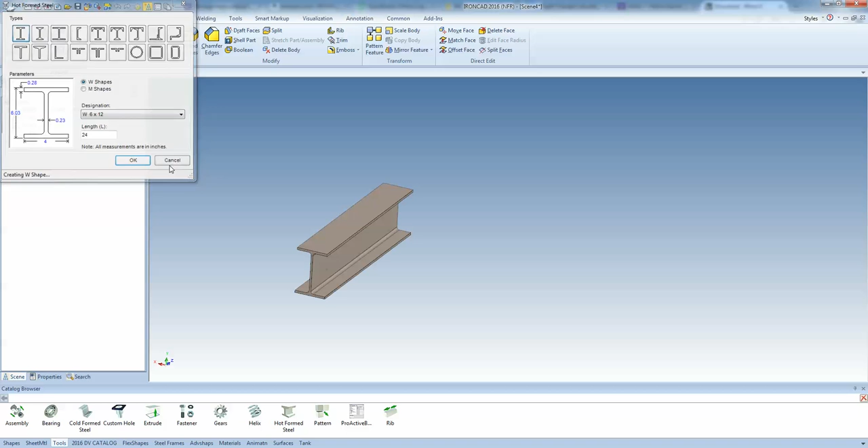From our tools catalog, we're going to drag in a hot formed steel shape. As you can see, we have just about any kind of structural shape available for your design process. For today's example, we'll pick a W6 by 12 and make it 24 inches long. By using F10 to activate the tri-ball, I'll right click and drag, and we'll link here at 24 inches.

What I'm going to do is build an assembly today without using any sketches, using standard components and catalogs. So from our Flex Shapes catalog, we'll drag in a gusset that we're going to use to mount a shaft.

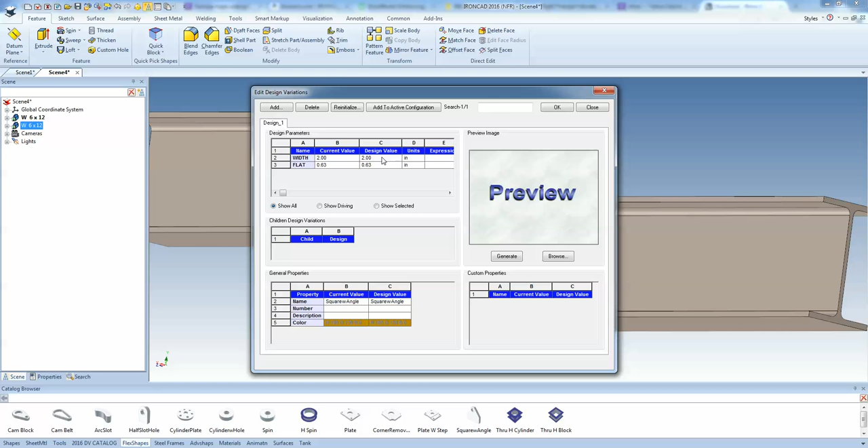In this case, we're going to be placing a bearing. I'll make an 8-inch overall dimension. We'll click on our hole, F10 to activate the tri-ball, and I'm going to edit distance from point. We're going to pick 3 inches, and we want to resize our hole to 3 inches as well.

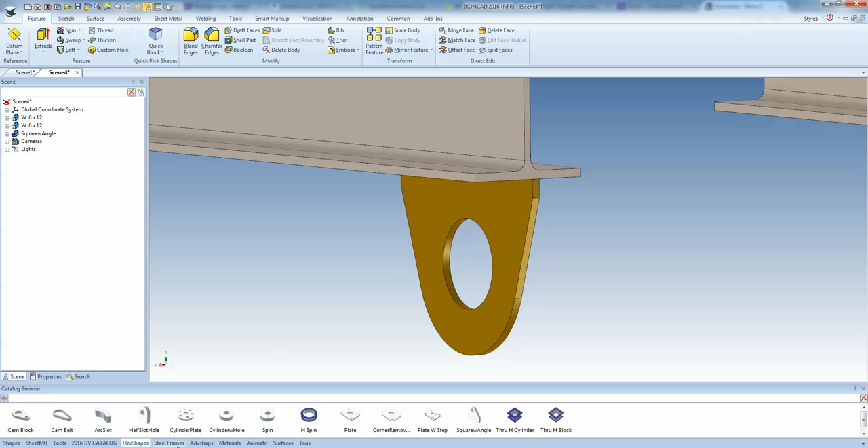Now what I want to do is go back to our tools catalog and drag and drop in our bearing. I know I'm going to use a 1-inch shaft, so we'll enter 25.4.

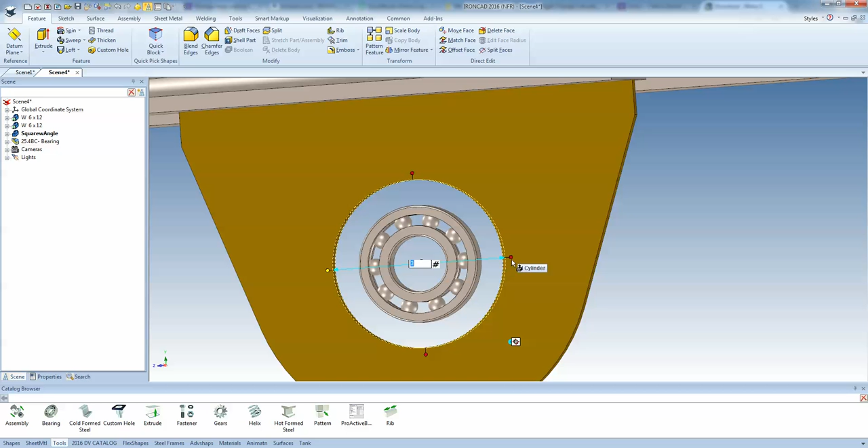Again, activating the tri-ball and using the space bar to reposition the tri-ball, I'm going to lock that axis, left click and drag to that point, left click and drag to that face so that I'm aligned. Now very quickly I can right click and snap the point, pick the outside edge so that we're lined up.

And again, I want to resize this so it's nice and flush with the bearing. Now what I can do is highlight these, activating the tri-ball and the space bar to reposition.

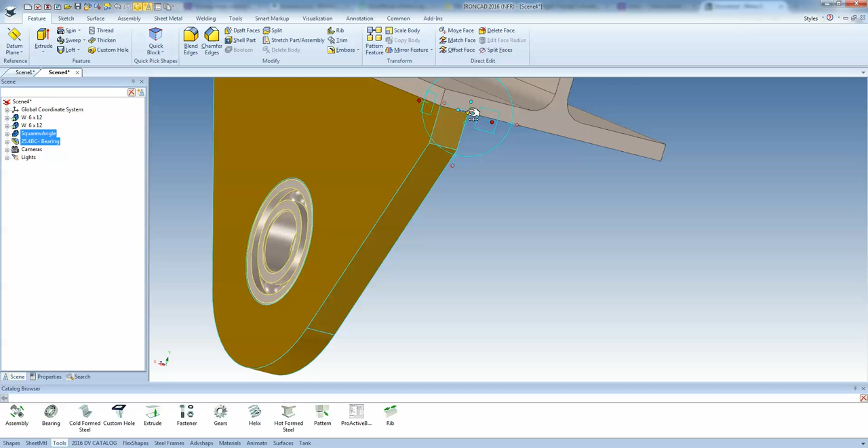I can snap to that corner, left click and drag, snap to that corner, and reposition to that corner, and I'm going to right click the point, and then right click that point and click link here. That way now I have the beginning of my two support gussets.

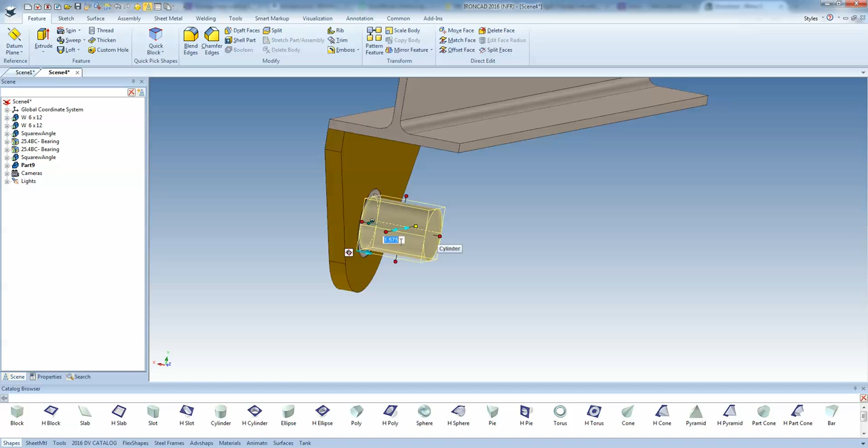Coming over to our standard shapes catalog now, what I'm going to do is right click and drag to that center point, and I want to drop that as a part. I'll activate my tri-ball real quick to reposition. By left clicking, I can type in 1.5, right click the point and snap to that point so that I'm aligned with that edge.

What I want to do is keep building on this cylinder, so I'm going to left click and drag right onto the center point. We'll type in 1 inch for our shaft diameter. Left click once on our outside handle for 2 inches.

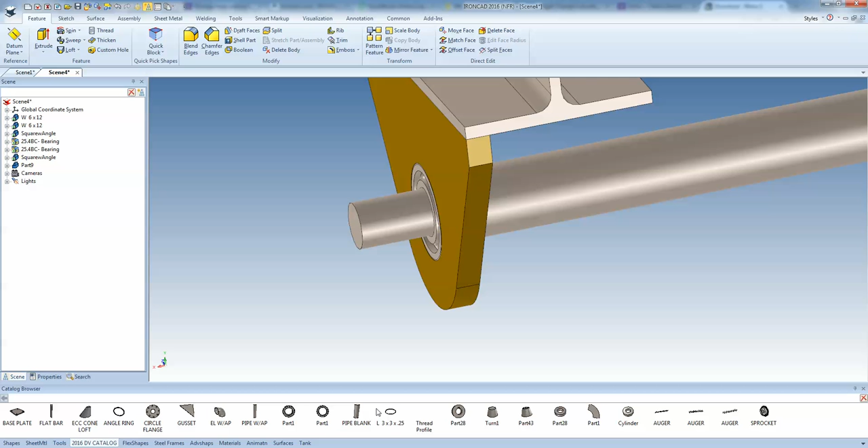Now getting into our standard catalogs, if I come over to my design variation catalog, I have a thread profile that was custom created, and since we know a 1 inch shaft standard thread is 8 threads per inch, I click OK.

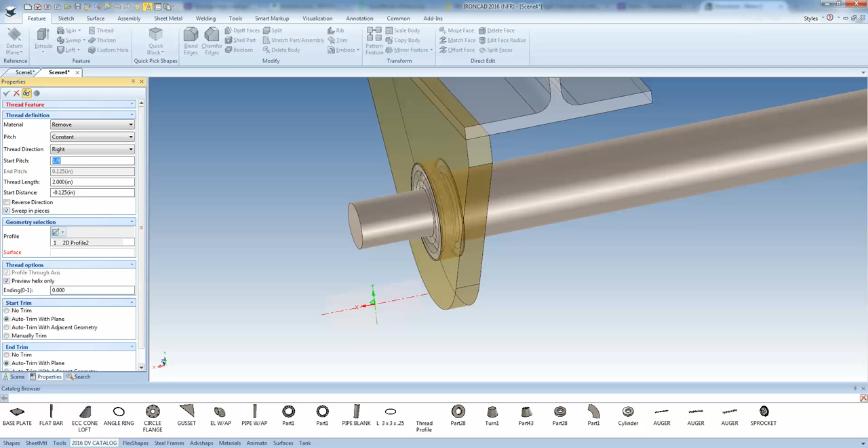Coming over to our thread feature, I can click my part. You can see it's already picked up our profile. My start pitch will always be 1 divided by my threads per inch. My start distance, I want that to match. So we'll click our face. You can see we have a preview of our thread profile. I finish, and I've created a thread really quickly. I won't need that profile anymore, so I'll go ahead and delete that out.

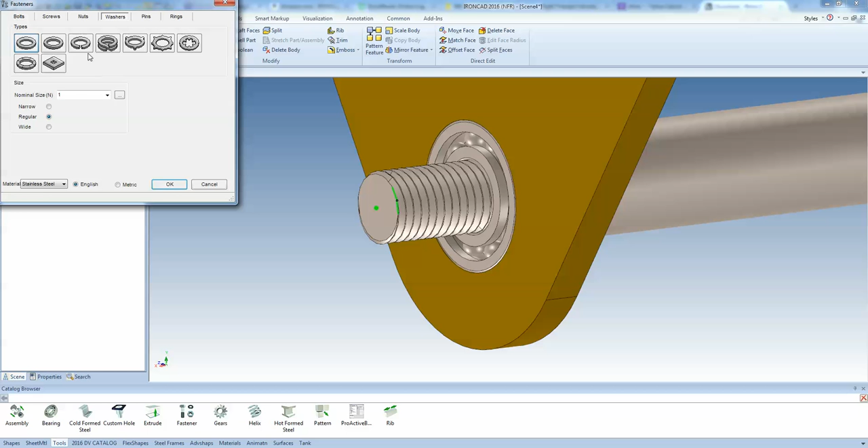Coming back to our tools catalog, from our fasteners I'm going to drop that on the front of that shaft. I want a washer. Click OK. We'll activate our tri-ball, snap to point, and again we want to put a nut on here now, so we'll drag out our fastener again.

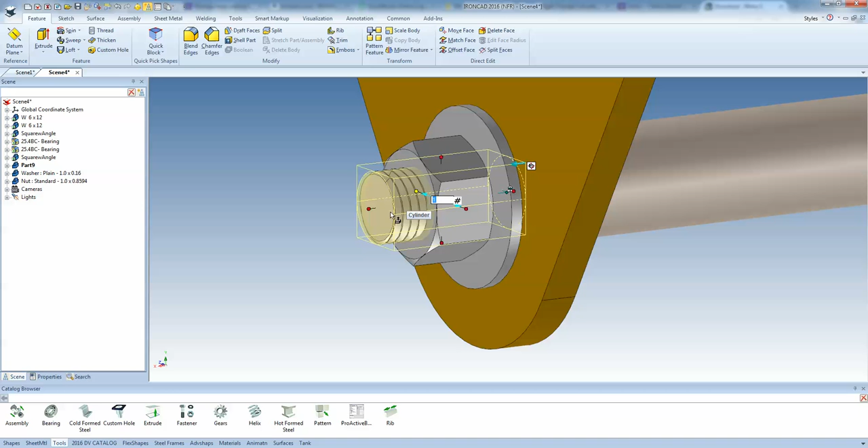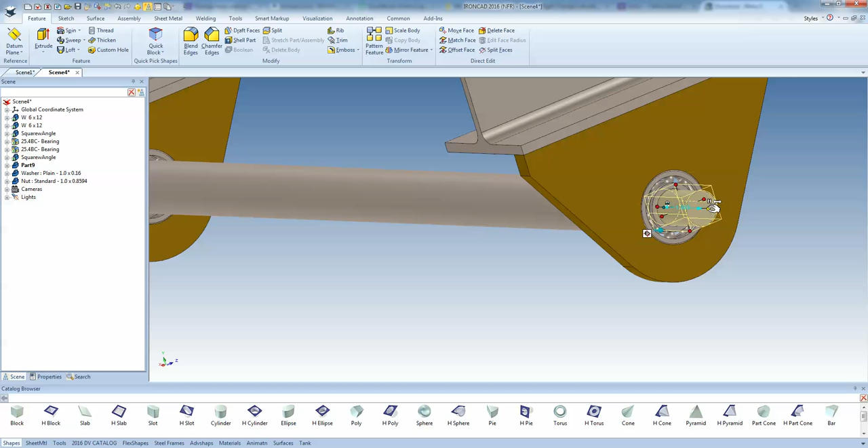Now what I want to do is continue my shaft on the other end. Coming back to our shapes catalog, we'll drag, left click and drag another cylinder, type in 1 inch again. In this case we want our shaft to be 3 inches, because we're going to put a sprocket from our custom catalog, again our design variation catalog.

In this example I have actually created this based off of a spreadsheet. So in this case I want to use a 40 pitch. My tooth quantity comes up with options. I want to go ahead and go 16 teeth, and I want to go with a 1 inch. We'll save that.

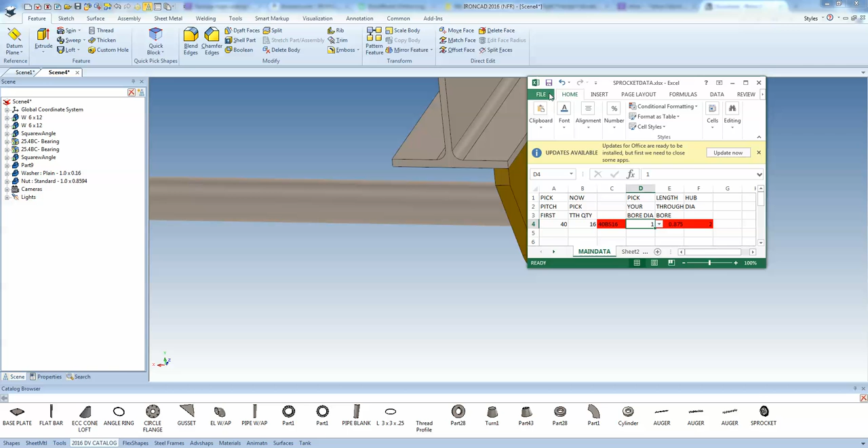I'll go ahead and hide that. Now I can left click and drag my sprocket out. It'll grab that information from Excel. Boom, builds a sprocket for me automatically. We'll activate the tri-ball and just drag that in there.

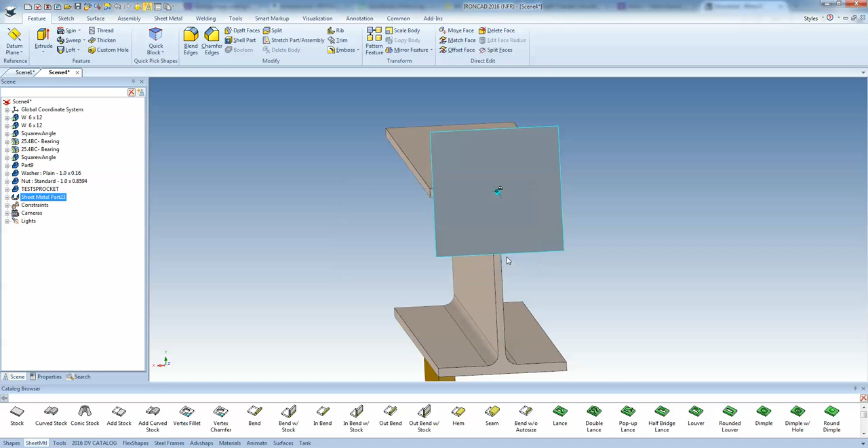The final thing let's do is go to our sheet metal catalog, and we're going to put a guard around this really quickly. So I'll just go ahead and zoom in a little bit, drop that on the face, and F7 to look straight on. Then I can just go ahead and do a rough size on my guard. Bring that down below there. We want to snap that to that face. So we'll go ahead and zoom in.

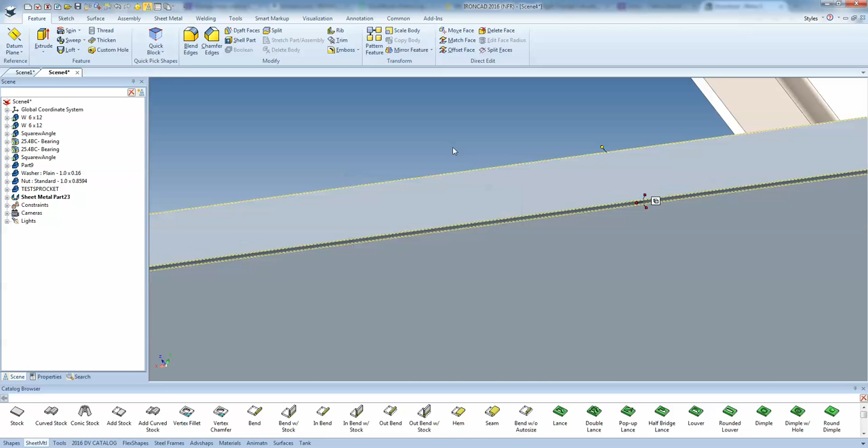From our sheet metal catalog, we'll go ahead and drag and drop a bend in there. I'll double click that. I want my outside vertex. We'll do 1.5 inches. Coming up to our sheet metal ribbon bar, we'll add miter.

We want to close this flange up, so I'll click my flange. I'll click this option for where I want it to do, and I want to do all 3 sides, so I click the face, I click finish. You can see that closes up really nice.

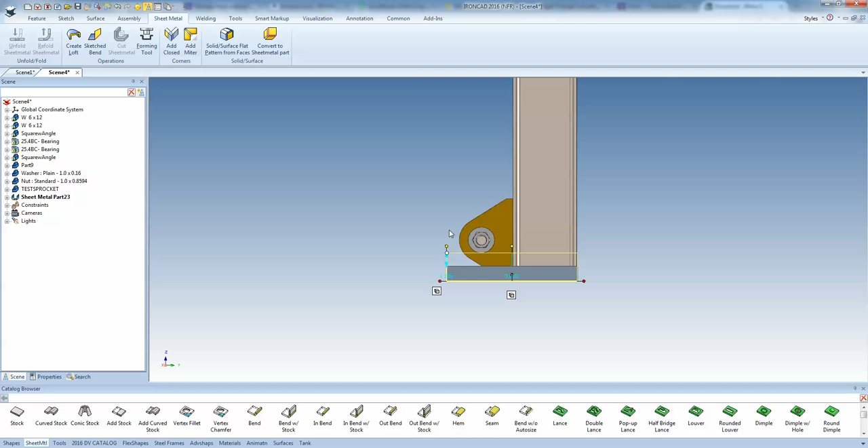Now what I'll do is I'll go ahead and highlight these 3 sides, and again F7 to look straight on. I want to go ahead and pull this up, so I get my 3 sides covered.

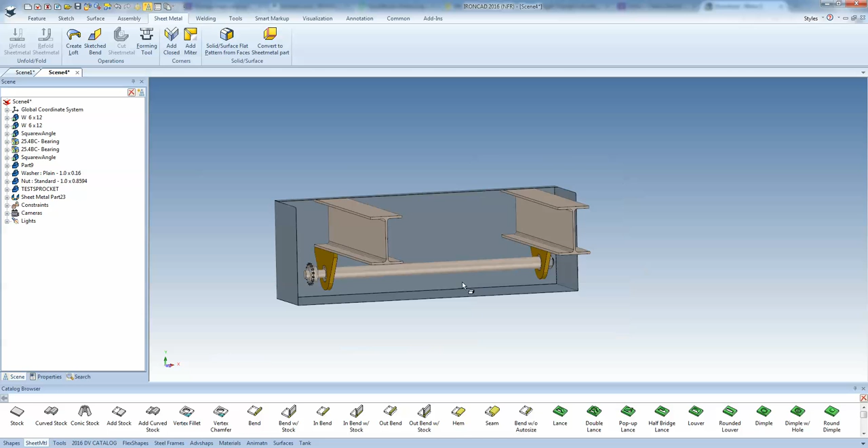And the last thing we'll do is from our sheet metal catalog, we'll drop a nice fillet on the corner. Let's say we want a 1/4 inch fillet. We'll do that on both sides. And very quickly you can see, without any sketches and from standard catalogs and custom catalogs, we created ourselves a nice model here of a shaft with sprocket, all done with our catalogs.